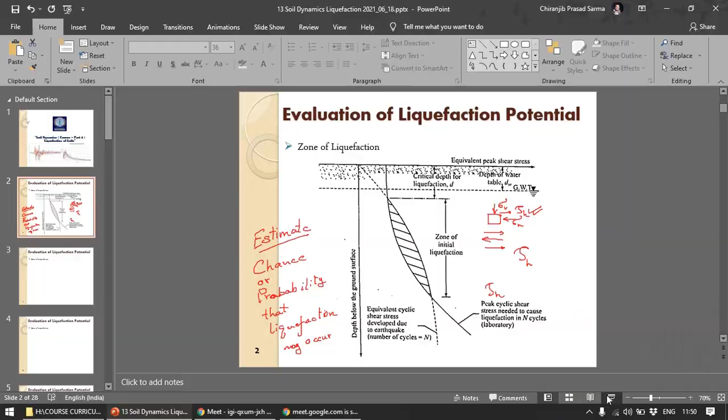Then in the next step, we find out what is the resistance against liquefaction of the soil. So for that particular shear stress, how many numbers of cycles. We know that there is a relation of peak pulsating shear stress to the number of cycles.

As the peak pulsating stress decreases, the number of cycles increases. We have seen that. So for that particular shear stress, what may be the number of cycles required, or if we know the number of cycles, what may be the shear stress required. Ultimately we find out what is basically the resistance of the soil, the cyclic resistance of the soil, which is the peak cyclic shear stress needed to cause liquefaction in n cycles.

And that n cycles is the same as what we assume may occur during the earthquake. Ultimately we find out that, and we plot the two. This is the peak resistance, or peak cyclic shear stress needed to cause liquefaction, and this is the shear stress caused or developed during the earthquake. So when it exceeds the resistance of the soil, there is liquefaction.

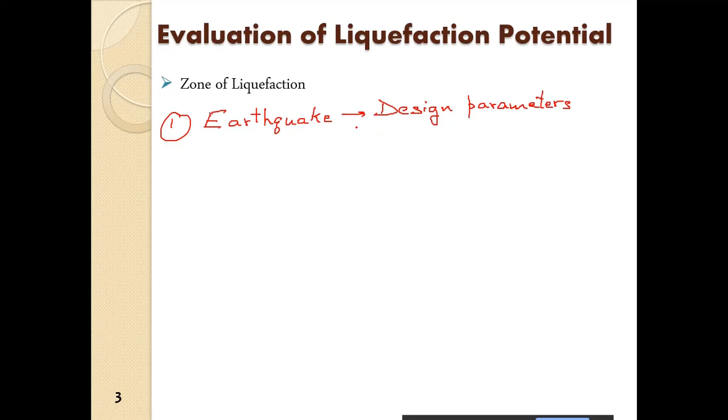Now this is a different chapter and we will deal with it in detail in that chapter. So these are the design parameters of the earthquake. Basically for our case, that is evaluation of liquefaction potential, what we require is first of all the maximum acceleration that may occur in that particular earthquake, and what is the equivalent number of cycles.

So we know in an earthquake it goes like this. So how many times there are reversals of stresses, the number of cycles. So that is basically what is required.

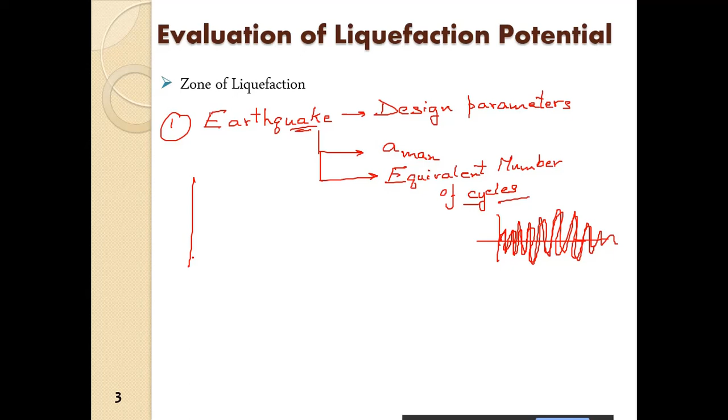Now once we have that, we can get the shear stresses at various depths. So at this depth, what is the shear stress? At this depth, what is the shear stress? So at various depths, and we can determine also the time history. So from the time history, we can get the number of cycles as well as A max.

Then apart from that, obviously, as we have discussed, in our case we need to know what is the peak cyclic shear stress needed to cause liquefaction in the soil. So for that, what we need is the grain size distribution of the soil at various depths. Especially we need the D50, that is percentage 50% finer, or the diameter at 50% finer. So that is what we require.

Then apart from that, one very important parameter that we require is, of course, the depth of the groundwater table.

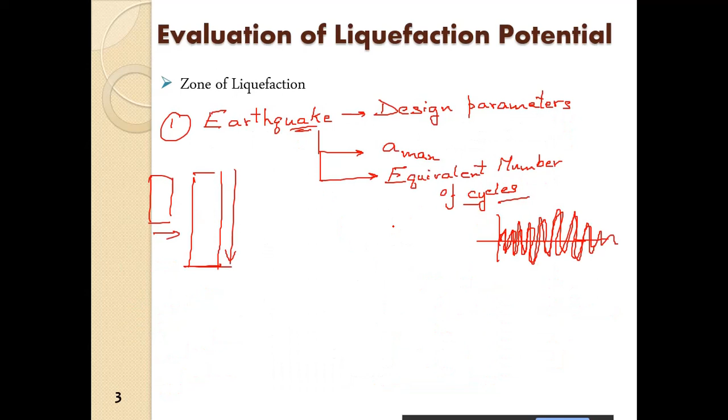So now how do we do the analysis? First of all, we need to find out the shear stress, or tau max as we may say, at various depths.

So suppose at a particular depth H, what we do is assume the column of soil on top of it to be rigid initially, and this entire column is moving above this plane. So there is another mass here, another mass here. We have this plane of shearing, so we can consider this soil column of unit area.

Just like in direct shear, so suppose this mass - first of all we need to assess the mass of this. Obviously area into height is the volume, into unit weight is the weight of the entire soil column.

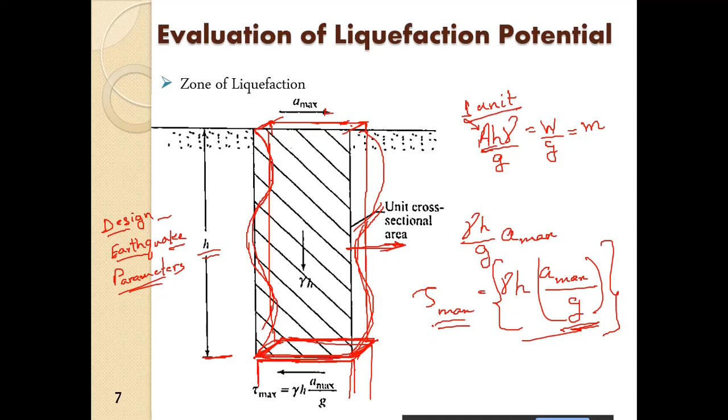So to account for that, we need to apply a reduction factor. So what we do is tau max field equals the reduction factor, RD, or in some books CD, into this tau max. That is the actual shear stress applied on this particular plane due to the earthquake.

So here, when there is a shear wave, the column of soil will behave as a deformable body instead of the rigid body we assumed on top. So instead of that, it will behave like this, and instead of tau max, we have tau max field equals reduction factor into tau max.

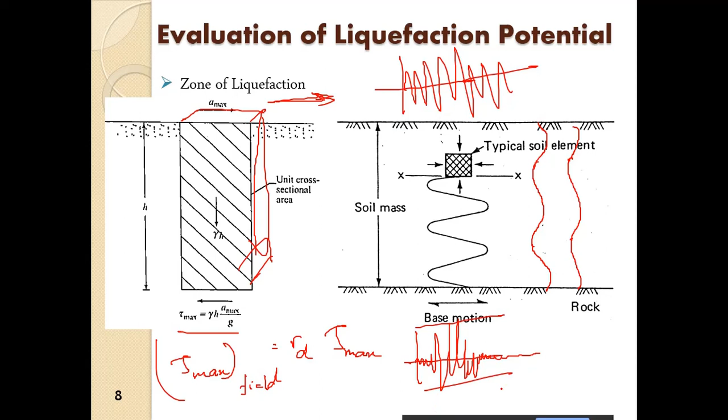But in the actual case, what will happen is that there will be a reversal of stresses. So what they did is they defined this term: if we consider a constant force for the analysis, we take the average equivalent uniform shear stress as 65% of the peak cyclic shear stress. So in a particular earthquake, there will be like this, and suddenly there will be a huge peak, and then it will be like this. So of the peak shear stress, or the maximum acceleration, whatever we have considered, they have taken 65% of that cyclic value, that is the tau max.

So they consider tau average is equal to the reduction factor rd, or cd, or whatever way you use, into gamma h into a max by g, and 65% of this. So tau average equals 0.65 into rd, the reduction factor, then gamma h, which is the stress at a particular depth, into a max by g. So this is the shear stress which will act at a particular depth h from the surface.

Obviously rd, the reduction factor, will also change with h, so rd is also a function of h, and that we have to take into consideration. Obviously a max will also actually be a function of h, so there are various other factors to consider, but in analysis we mostly take a max constant with depth. The reduction factor takes into account whatever reduction needs to be done in the shear stresses, so we have reached the maximum shear stress that we need to take into consideration.

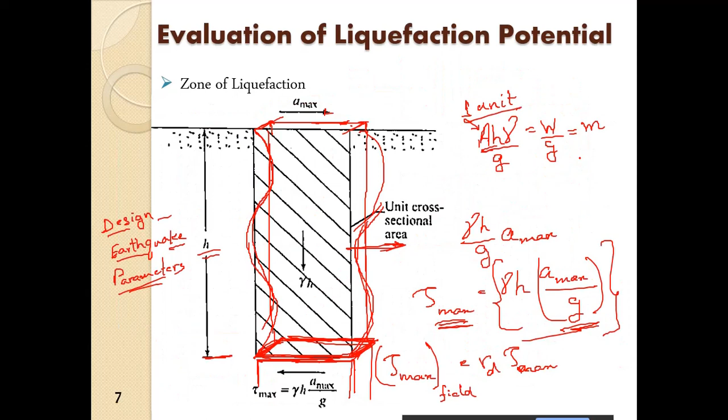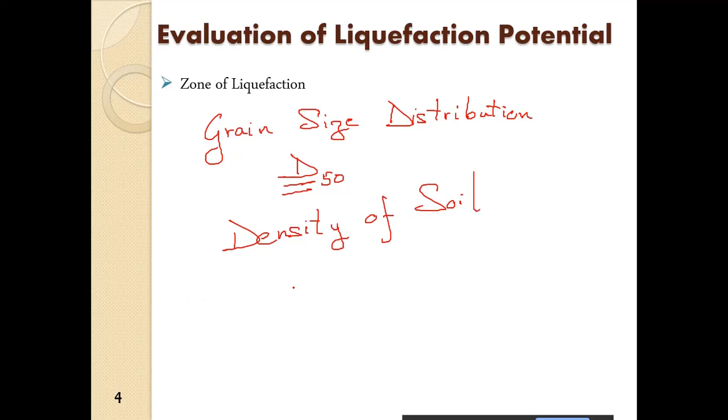So here one more data that we need, apart from grain size, is obviously the density of the soil. So we need to assess the dry density of the soil, the saturated density, and the void ratio. These are some important data required for the analysis.

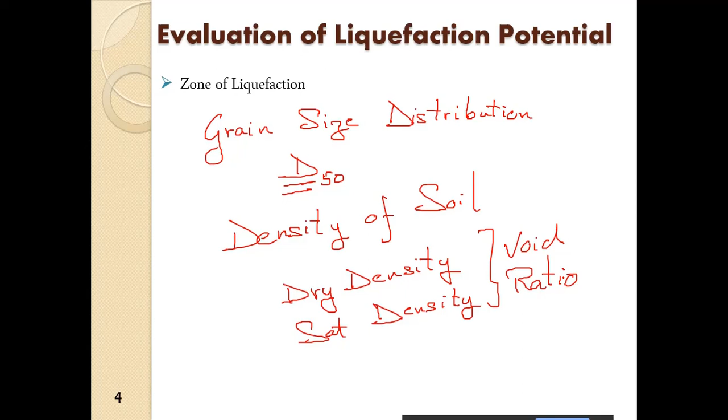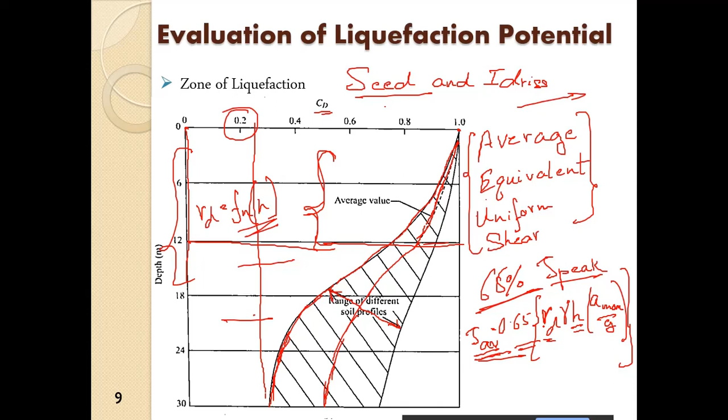So you plot the tau h here and you plot the tau average here. The depth at which the tau average value is obtained from this particular slide, this is the value of tau average, and here we have obtained sigma dc by 2.

What are the different stress ratios here for different numbers of cycles? For different magnitudes we have obtained sigma dc by 2, so tau h by sigma v is equal to alpha dash into sigma d by 2 by sigma 3.

In the last class we also saw that there are various correction factors for these values. We use those correction factors and then we obtain what is tau h.

So tau h we obtain, and then sigma v dash will change with that, so tau h will change with that. And we plot the two curves, tau average - so this is tau average.

I will plot the tau average in different colors, so this is tau average here. And this is tau h, which is the peak cyclic shear stress required to cause liquefaction of the soil.

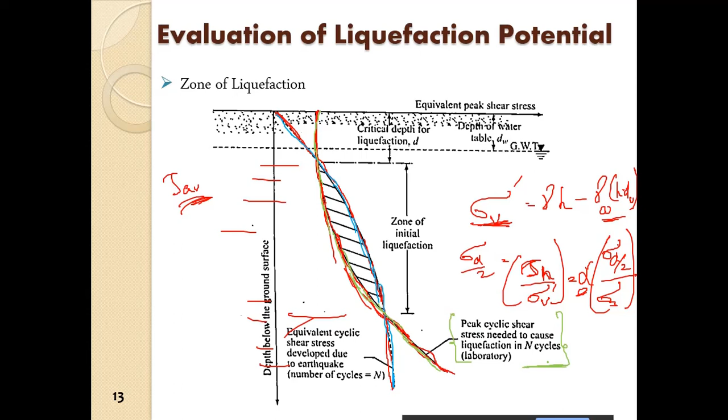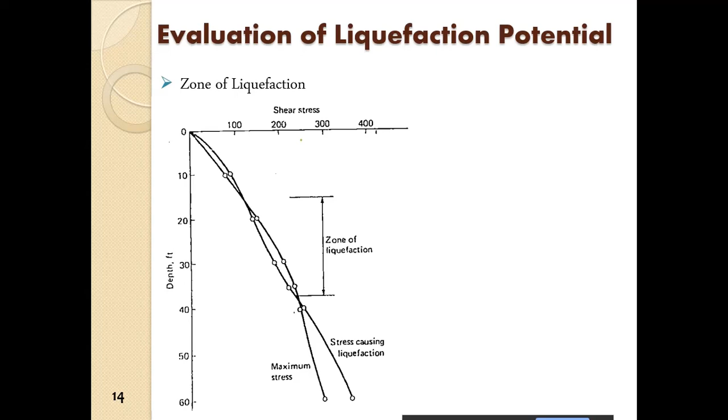So we will obtain this kind of curves. Here we will see the stress causing liquefaction - it went below this part here. So this is the peak shear stress required for causing liquefaction, and here this is the maximum stress.

This curve went way beyond, it went past the maximum resistance, right? So this is the zone of liquefaction - from this depth to this depth, we have the zone of liquefaction.

This is given in feet, you can change it to meter or whatever way you want. For different units you will have different x and y axis, but ultimately, in situ, you will find that this is the zone of liquefaction.

Now, using the above concept, what we can do is - this plot shows A max by G. We have the A max by G as here what we have obtained, so this is the A max by G.

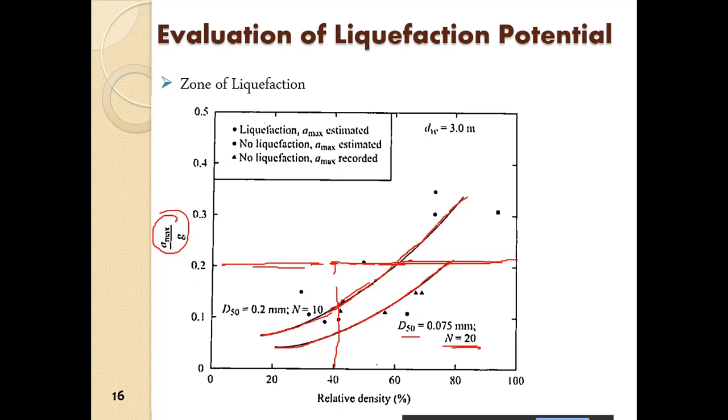So suppose the point A max by G lies in this range, and this is the design earthquake. If the soil relative density lies around 40, it is prone to liquefaction for this magnitude earthquake - around 7 to 7.5 magnitude.

Okay, so here what we see, if the relative density is suppose 80, then for the design acceleration, earthquake acceleration, we see that that particular soil is not prone to liquefaction.

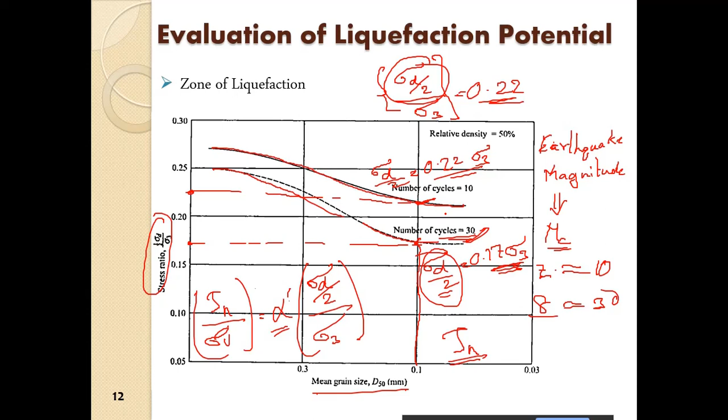So we have a design acceleration, and we need to find the relative density at the field. Obviously for different mean grain sizes and different stress ratios, the design curves are already established, so from these design curves we can establish curves of this sort.

The main inputs are the number of cycles, the depth of groundwater table, and the percentage finer diameter - what is the diameter of the 50% finer soil. Of course, A max by G will be the design earthquake acceleration.

Now apart from that, what Seed, Mori and Chan did in 1977 is they correlated the cyclic stress ratio required for causing liquefaction - tau by sigma naught - to the N value for causing liquefaction, so if it plots...

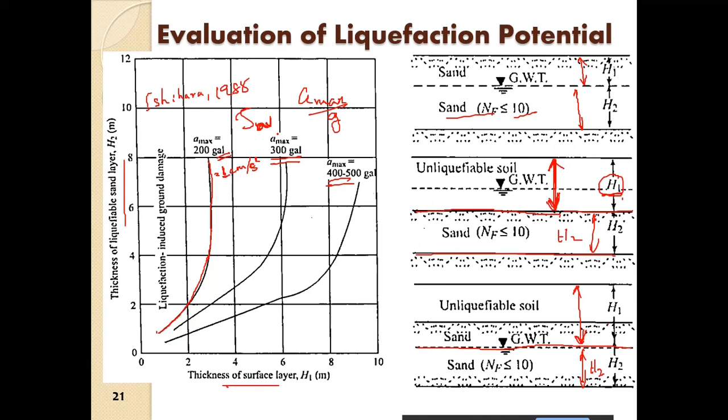Based on sigma v, which is the normal vertical effective stress, and the shear stress, when we find out what is the effective stress condition in the in situ field, we can find out what is the peak pulsating shear stress which will be required to cause liquefaction.

This is based on the SPTN values. Again, we find out the tau average, which is very easy. This is called the stress ratio method for finding out the liquefaction potential.

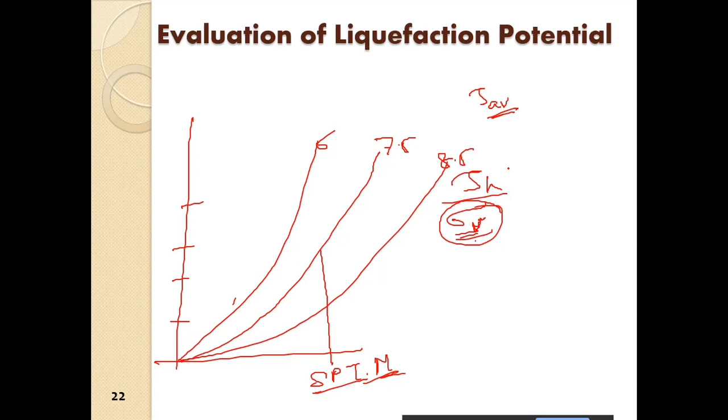Of course, there are different methods also. Instead of SPTN values, we can use cone penetration values. Then there is limiting strain - this is a stress based method. Then there is a strain based method as well.

So what is a strain that may cause liquefaction? We have seen that for loose sand there is a high amount of strain, and for dense sand there is a low amount of strain. So what is a strain criteria for liquefaction? There are different criteria as well.

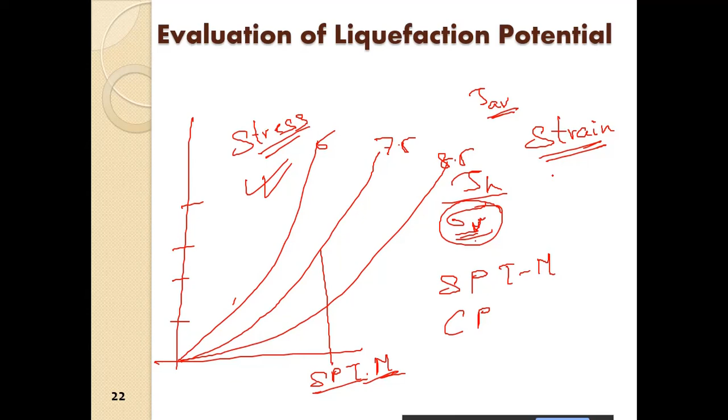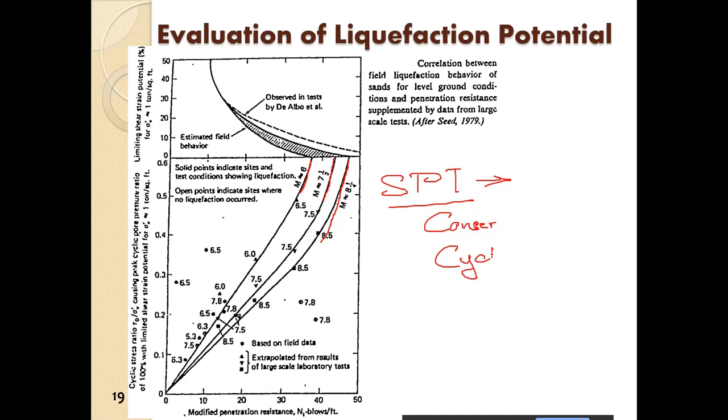So this is how we evaluate the liquefaction potential. Based on the SPT values, it is not very complicated. The thing is that the values are somewhat conservative, but in certain cases of cyclic mobility, it is unable to predict the occurrence of cyclic mobility. So it may show that there is no liquefaction, but there may be occurrence of cyclic mobility. In that case, the strain may be limited because the soil will be mostly dense, so relative density will be high.

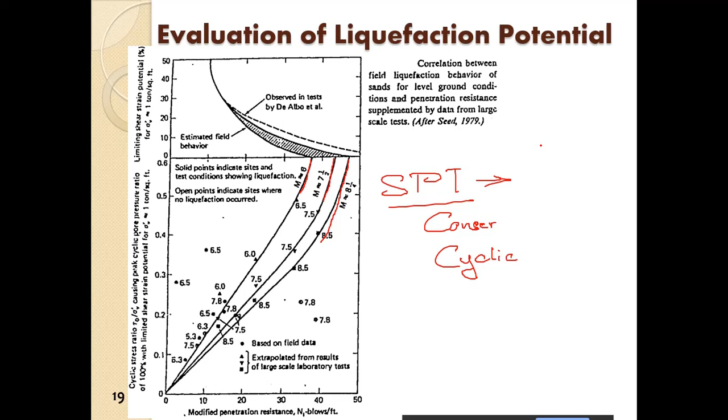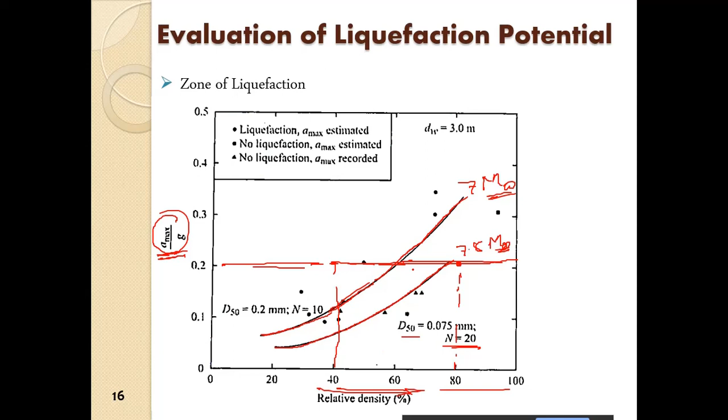Then again we see that based on grain size distribution, the peak acceleration ratio, and the relative density of the soil, we can find out whether the soil will liquefy or not. So this is the different various methods of how we evaluate the liquefaction.

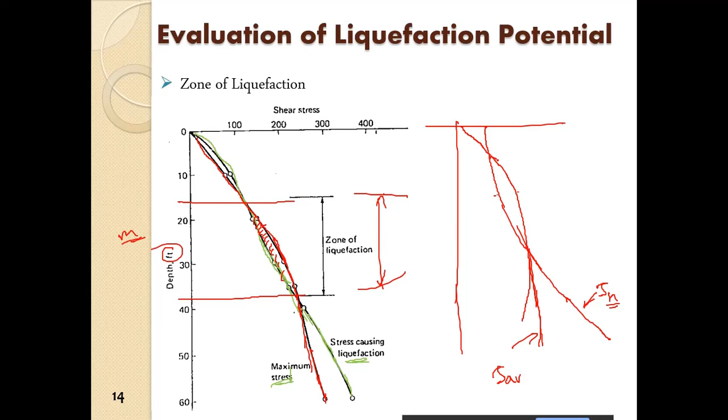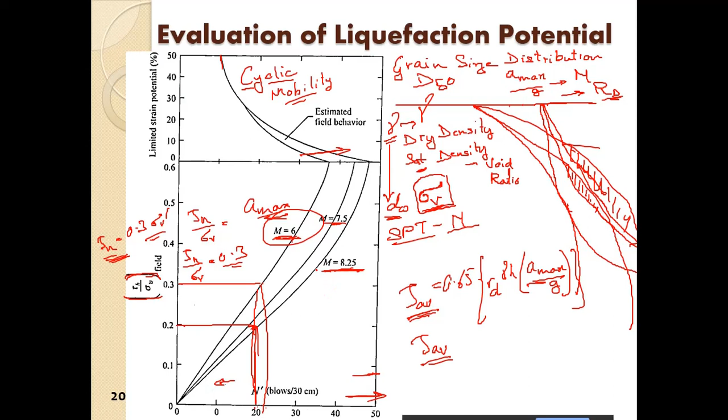So for different earthquakes, as we saw here, we will have different values of cyclic stresses as well as different values of the shear stresses induced due to the acceleration in the soil. So for a magnitude 6, Amax will be way less than for a magnitude of 8.25 or 8.5. In the chapter on earthquake design parameters, we are going to discuss how we can evaluate the various ranges of acceleration Amax.